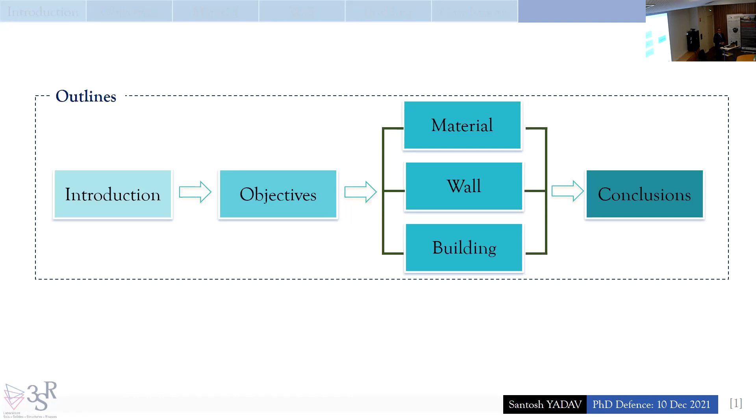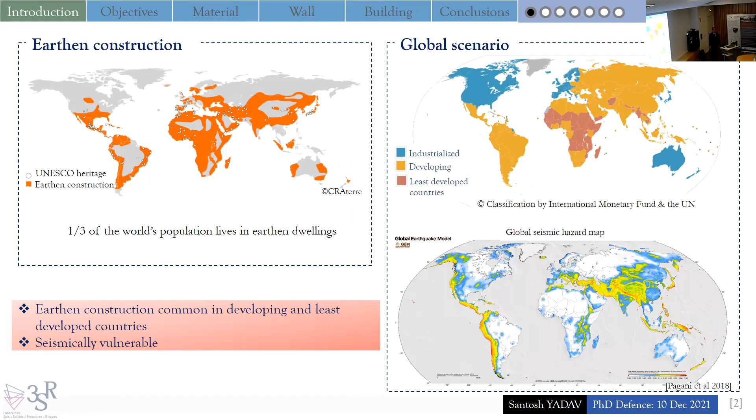Earth construction is one of the oldest construction techniques that is still providing shelter to millions of people around the world. And this type of construction is more common in developing and least developed countries, which also lie in seismically active zones, making them seismically vulnerable to earthquake events. Every year, thousands of lives are lost during seismic events, but actually it is not the earthquake that takes life, rather the building which fails to withstand the seismic load and collapses, that takes life.

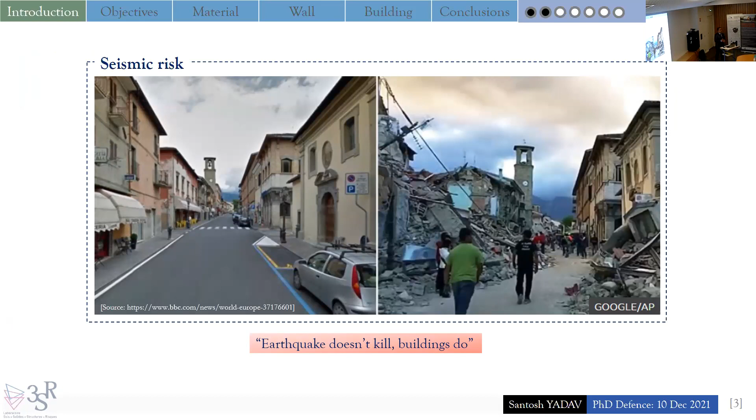So what happens during a seismic event? During a seismic event, there is a horizontal force acting on the structures, creating different stress scenarios for in-plane and out-of-plane walls. And in order to prevent this damage, this effect has to be minimized. There are different approaches available for strengthening unreinforced masonry structures and minimizing the effect of seismic action, and one of them is the horizontal seismic band, which is studied in this thesis.

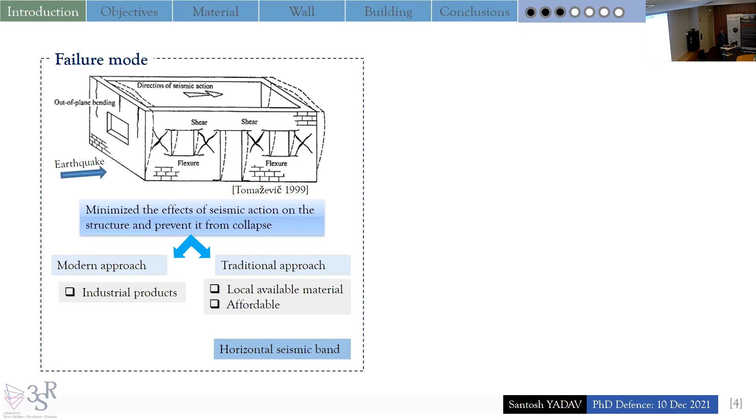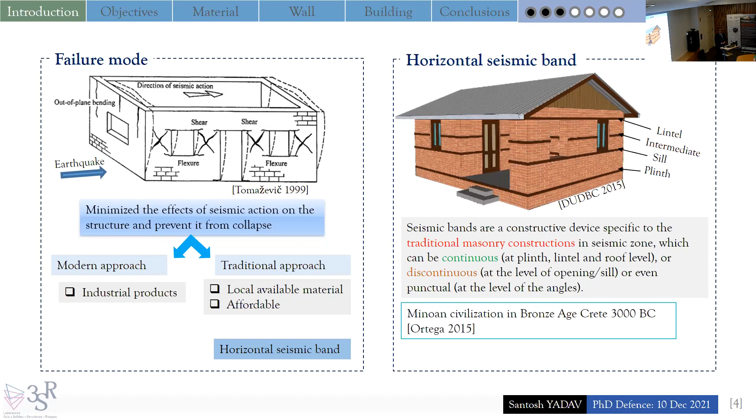So what is a horizontal seismic band? In literature, the exact definition was not available, so we have tried to define a horizontal seismic band as a constructive device, which is specific to traditional masonry construction, that can be continuous or discontinuous, depending upon the position of application. And this technique is not new. It has been used for more than 5,000 years now, and still we see the application of such a band with different materials around the world. But the documentation of the application of such bands in guidelines and building codes is relatively new.

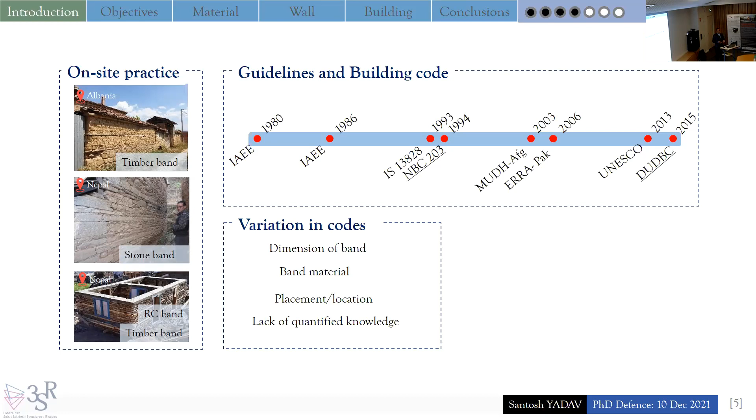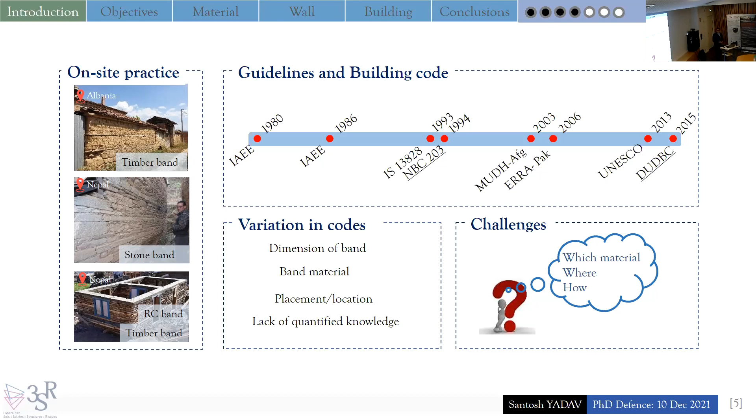It's been 4 decades now, and there are different guidelines which propose and recommend the application of horizontal seismic bands in the building code. But among these codes, there are variations in terms of dimension, material used, and placement of the band, and it also lacks quantified information regarding how the different materials behave in case of seismic action, which makes it challenging to recommend in the field. And in my study, the area of focus is Nepal, so I have referred to the DUDBC guideline, which is based on the National Building Code of Nepal, National Building Code 203 of Nepal.

Nepal lies in a seismically active zone because of the presence of two tectonic plates, and because of the difficult terrain, it's very difficult for road transportation. And due to the seismic event in 2015, thousands of structures were completely collapsed. And as a support from international organizations, AE&CC and CRAterre were involved in the reconstruction activity in Nepal, along with the collaboration of local partner ASF Nepal. During this reconstruction activity, they provided technical support and training to the local community. But not all houses were properly monitored, and people were seen applying different types of bands in the same structure without following the guideline that was provided by the DUDBC, which created a challenging question regarding what could happen in case of a future earthquake.

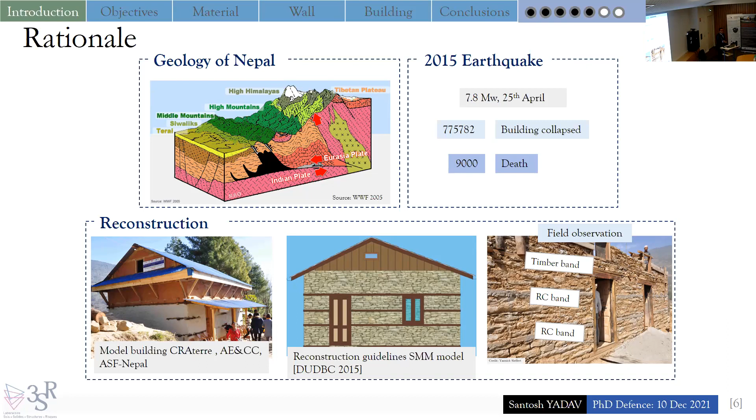Because of the active seismic plate, it's only a matter of time when it will occur, but definitely we have to make sure these structures are safe from the future earthquake. And in the field during the reconstruction, there were various stakeholders involved, and they were not able to address the concern regarding the selection of material, whether it should be used with the timber or with the reinforced concrete, and what could be their performance in case of future earthquake.

So in order to address these challenging questions and the request from the stakeholders, AECC took the responsibility to collect the relevant information from site and collaborated with 3SR Lab in order to study this behavior scientifically. So in the global interdisciplinary framework, my PhD research work plays a small role in addressing the scientific challenge that is faced in the field, and provides the scientific recommendation for the community and the various stakeholders, which will

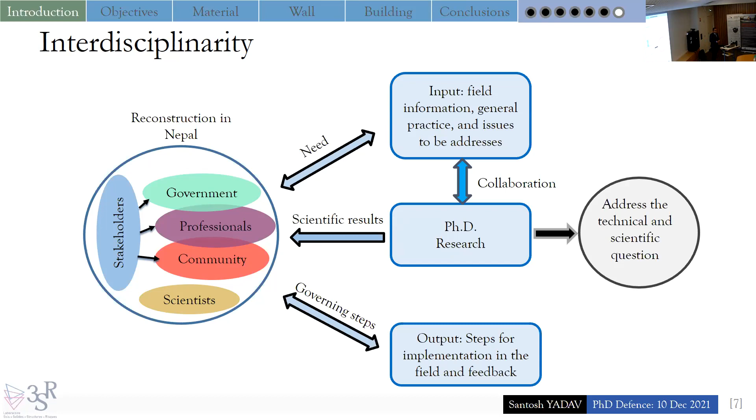be later shared among various stakeholders to implement in the site, and also get feedback from the community in order to decide what further research work has to be carried out in order to address the issue in the field. Even in the core PhD research work, there is the involvement of various engineers and architects, which helped in planning the experiment, designing the setup, and execution of all the experimental work.

Now, looking at the state of the art on seismic bands, the mechanical performance of seismic bands has been studied in quasi-static and dynamic tests, but there are only a few research works which highlight the advantage of having a horizontal seismic band in the structures, and there is a lack of comparison between different materials when used as a seismic band. And also in numerical analysis, only a few numerical analyses have been made, and there is a lack of proper validation from the experimental work.

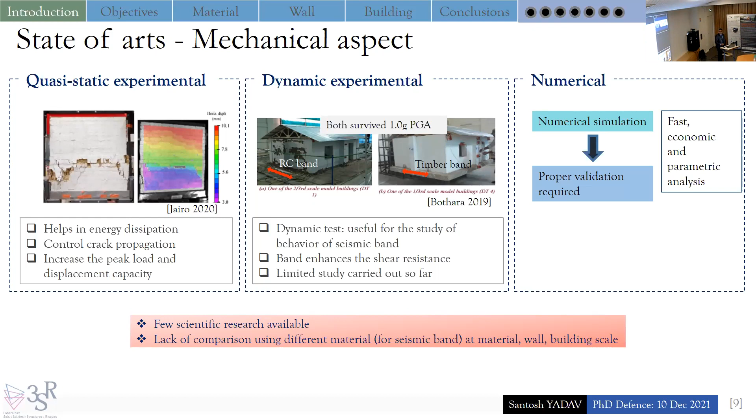No problem, continue. Okay. That doesn't matter.

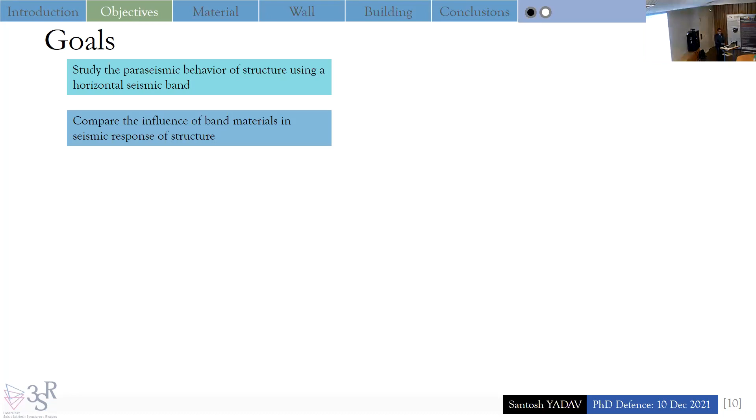Okay. So to address this gap in the literature, the objective of my thesis is defined. The main objective is to study the behavior of horizontal seismic bands and compare the results of two materials when used as a seismic band, one timber, another reinforced concrete. This project is a part of a global work, which is classified into experimental and numerical. My work is mainly focused on the experimental work, and there was another parallel PhD who developed a numerical model for masonry structures, who completed recently, a few months back. And my experimental results were used for the validation of his numerical model.

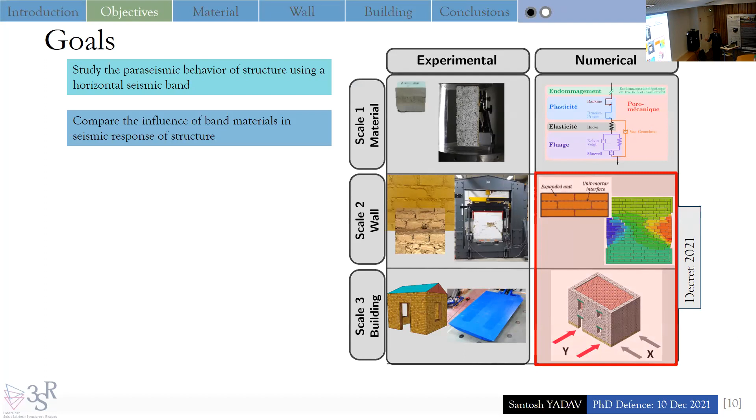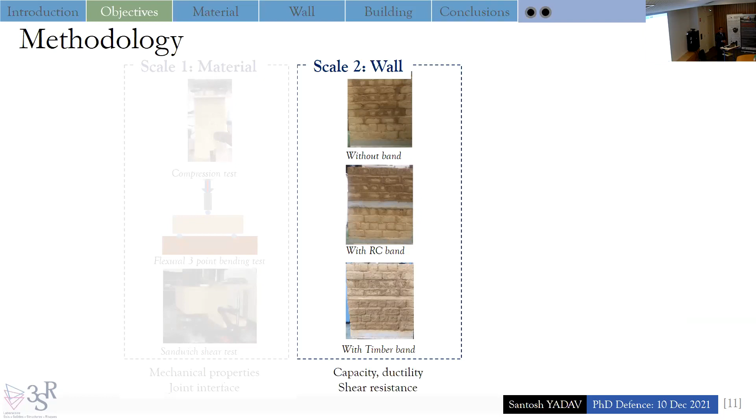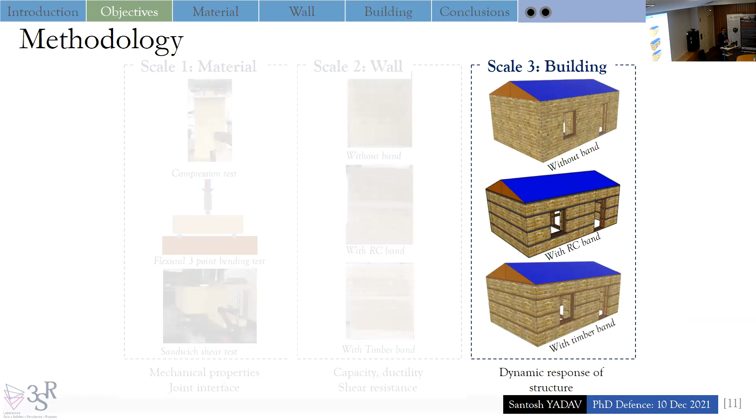To achieve the goal of my project, we have divided the experimental campaign into three different scales. Scale 1 is at material level, where the mechanical properties of the material and the shear resistance at the interface are studied. At scale 2, the characterization of the wall is made with regard to capacity, ductility, and shear resistance. At scale 3, a reduced scale house is tested under dynamic load and their performance is compared. But before moving ahead with exploring the results, let me walk you through the timeline of my PhD journey.

Since the beginning of 2018, I was involved in the development of two experimental setups, the shake table and the shear setup. I spent more than 1 year developing these two setups along with another PhD student. And I also had developed and constructed samples to be tested on the shake table and with the shear test apparatus. But there was a fire incident in February 2020, which destroyed everything, both the apparatus that was developed was destroyed, and all my samples were completely gone. So there was no result available.

So in order to continue my work, we had to redesign and reorganize the whole experimental campaign. We had to design a new experimental setup, a reaction frame setup, to continue work at 3SR Lab. And we are really thankful to FCBA for providing us the opportunity to use their shake table for the dynamic test. And due to several reasons, there was no other option than choosing extruded adobe for our reduced scale model. But this also provided us the opportunity to compare two types of material, adobe and extruded adobe, which is compared during the study.

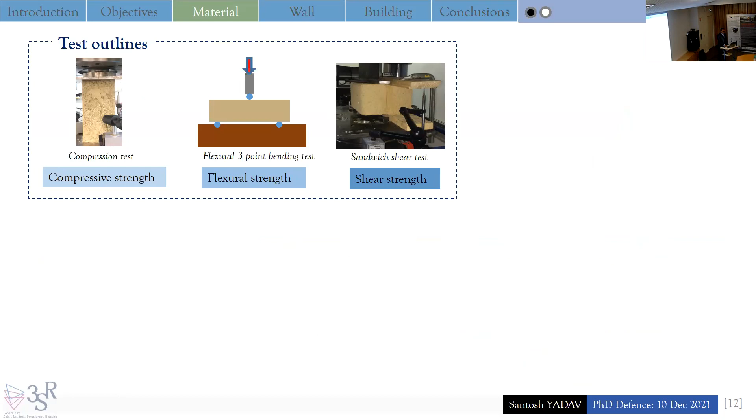And it was a very challenging period due to the pandemic and a lot of events that were ongoing. So it was a very challenging task to be completed in a short period of time. So now let's move ahead with exploring the results for material scale. Three types of tests were carried out to measure the compressive, flexural and shear strength of the material. These tests are important because during an earthquake event, the structures go through different stress scenarios, creating different stress modes, and these stresses can govern the overall behavior of the structures.

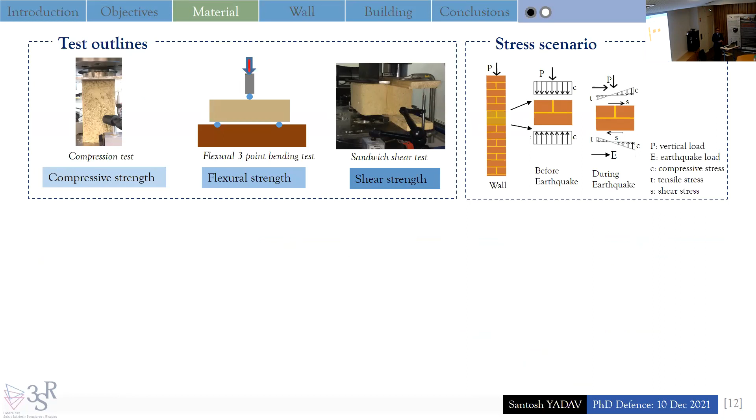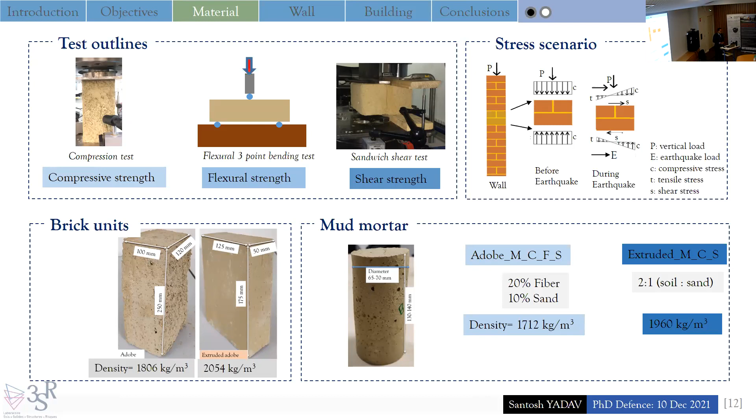Two types of brick unit are used: one is adobe, which is standard size, and the other is extruded adobe, which we have customized for our reduced scale model. There are two types of mortar, one used along with the adobe brick and another with the extruded adobe brick. For the compression test, the adobe brick is tested in the vertical orientation without having any interface on the surface, and the two mortar compositions are tested with cylindrical samples. The difference in the compressive strength is due to the composition of the material and the manufacturing process.

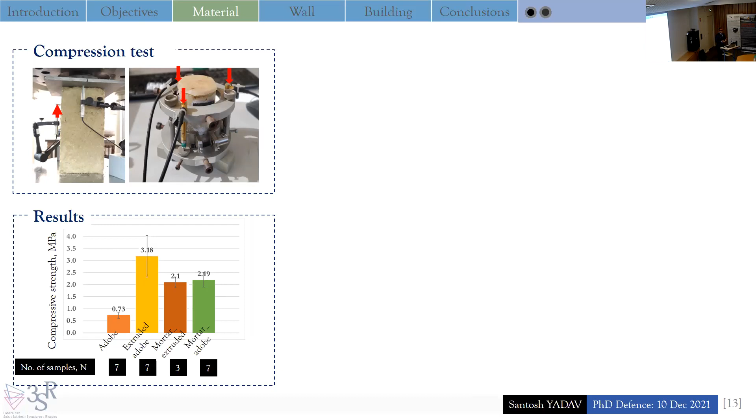Similarly, the flexural test is carried out with the 3-point bending test, and the maximum force at failure is used to calculate the flexural strength. As the failure is from the bottom part of the brick, which is brittle in nature, the flexural strength can be equivalent to the tensile strength of the brick unit.

Another test was done with a sandwich sample. We tested by fixing one of the bricks and applying load on the other brick in order to determine the shear resistance. This technique can also be used while optimizing the composition of mortar, which is very relevant in field applications as well. Here we can see the value for extruded brick is lower as compared to adobe because of the surface rugosity of the brick unit itself.

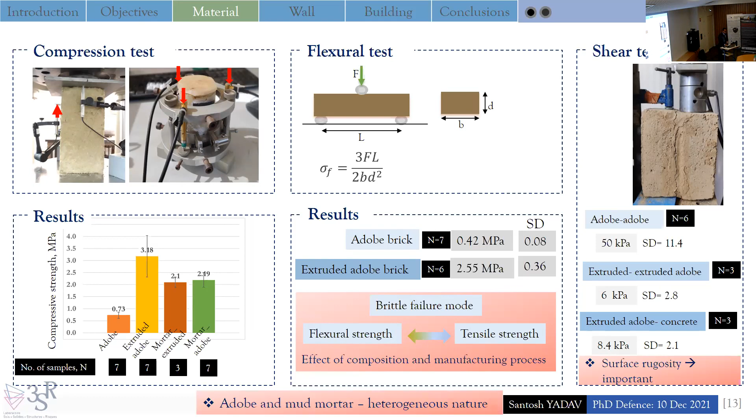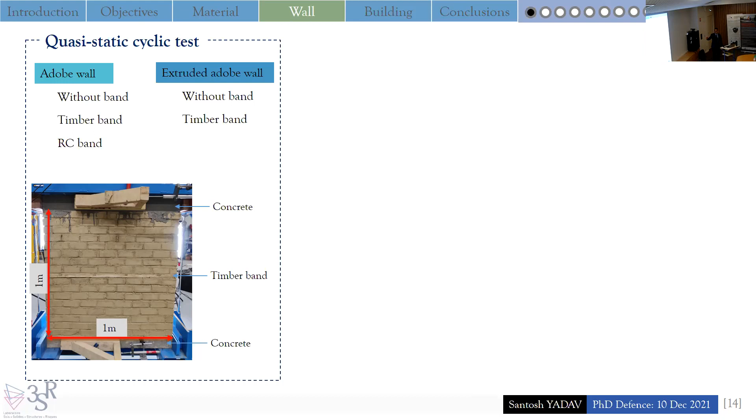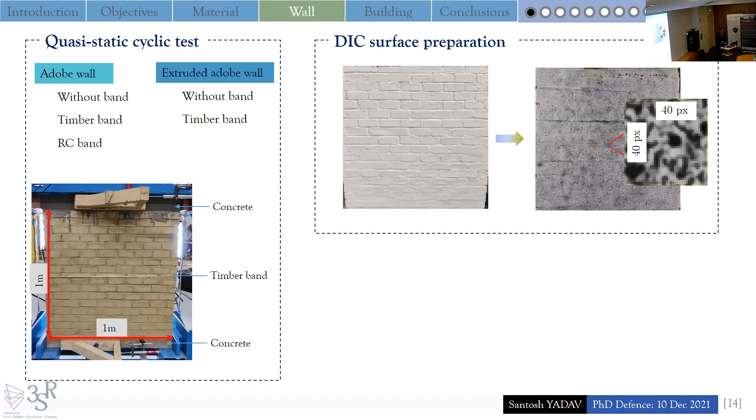Next, 5 wall samples were prepared, 3 with adobe brick and 2 with extruded adobe brick, and the dimensions of these walls were inspired from previous research work. At the bottom and at the top, we have a concrete part which is used as a support and for load application. All the samples were prepared with a random speckle pattern in order to carry out digital image correlation, and the results obtained from the measurement sensors and digital image correlation are analyzed.

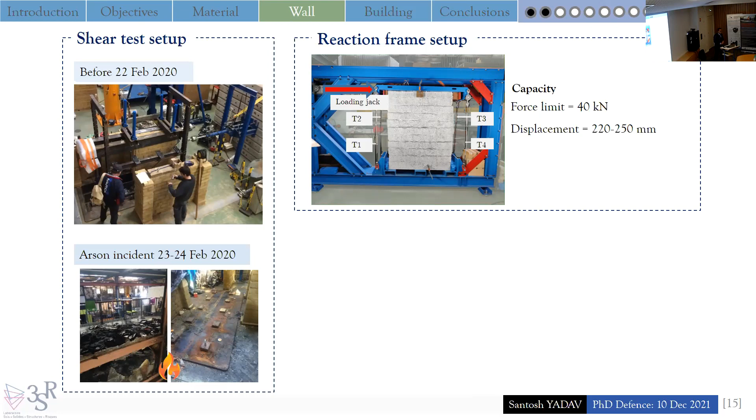As mentioned earlier in the timeline, we had developed everything for the quasi-static test, but unfortunately fire destroyed everything. To continue the work, we developed another setup, a reaction frame setup, which is driven by an electrical jack of capacity 40 kilonewton. The 4 bars indicated as T1 to T4 are used to apply the initial pre-compression load on the sample, which also helps prevent the initial rocking moment and transfer the shear force in the shear plane. All the tests were carried out in displacement control mode, and the same loading was applied for each wall.

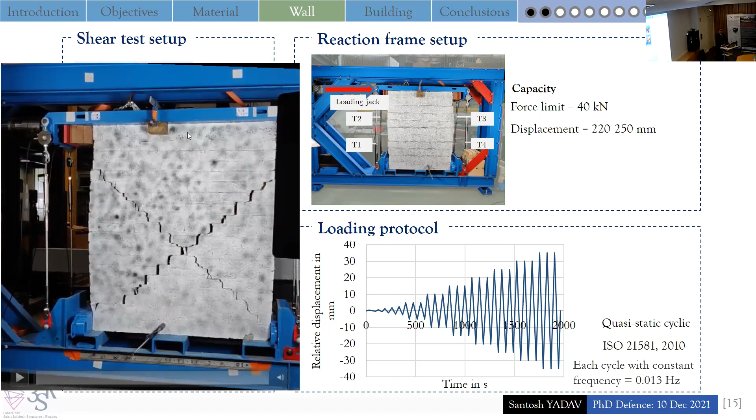So let's look at one of the videos of the test. Here we can see the load is applied on the top part, and we have a force sensor measuring the applied force, and there are 2 LVDTs attached at the bottom and at the top measuring the relative displacement, which is used for further analysis.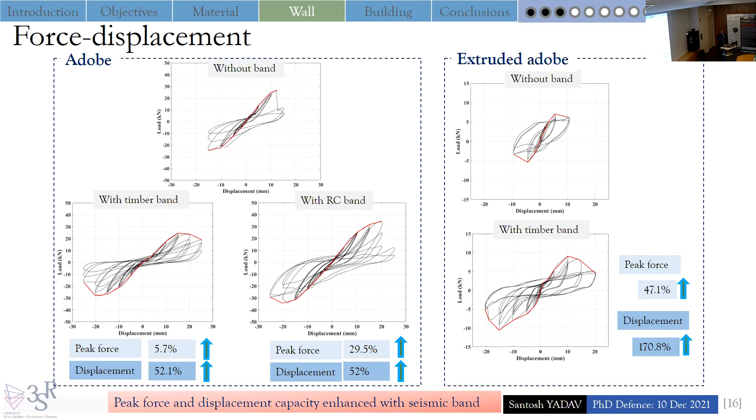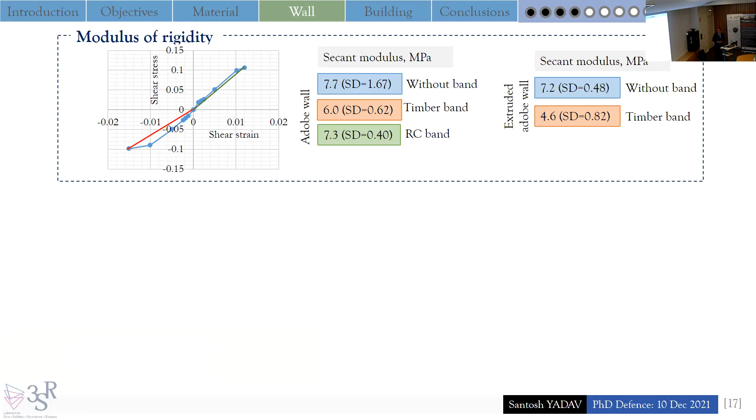Next, for calculation of the modulus of rigidity, the same curve envelope is used to obtain the shear stress-strain curve, and the secant modulus is calculated at the maximum level in both the positive and negative loading directions, and the mean value is taken for each case, which ranges from 4 to 7 megapascal. Another calculation is made for the stiffness degradation. For this, the stiffness at the same level of displacement in both positive and negative directions is used to measure the slope between those 2 points in order to obtain the stiffness at each level of loading or displacement limit. Here we can see that with the application of the seismic band, both the modulus of rigidity and the stiffness degradation rate are modified.

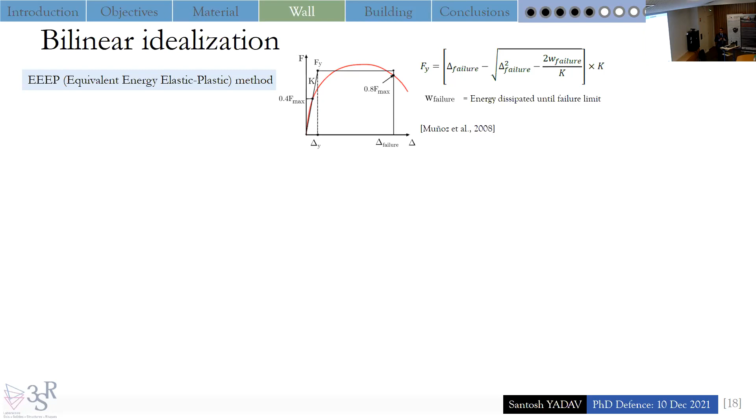Next, in order to characterize the behavior of the shear wall, bilinear idealization is made with the help of the equivalent energy elastic-plastic method. In this method, the failure limit is measured at 80% of peak load in the post-peak phase, and the initial stiffness is measured at 40% of the peak load, which provides the yield force limit taking into account the equivalent energy dissipated until the failure is reached. The bilinear idealization curve is developed for both the positive and negative parts of the envelope curve. For both walls, we observe that the capacity and the ductility limit are enhanced with the application of the seismic band.

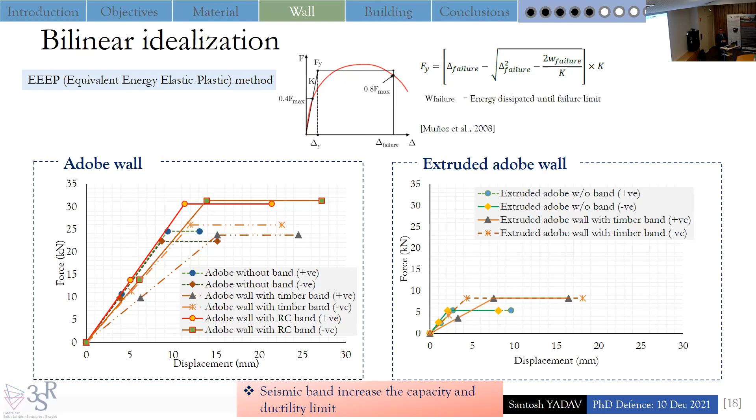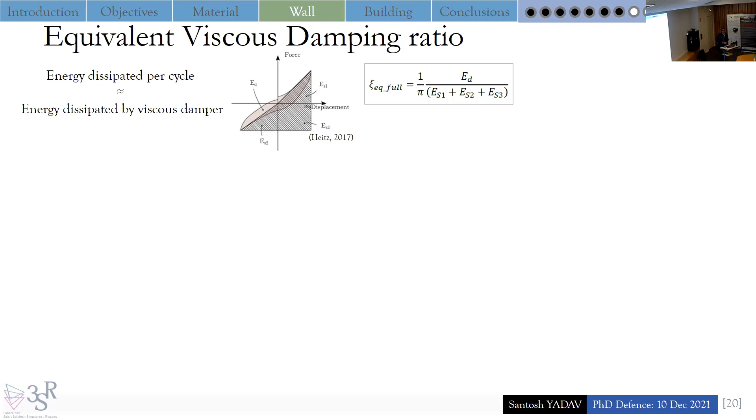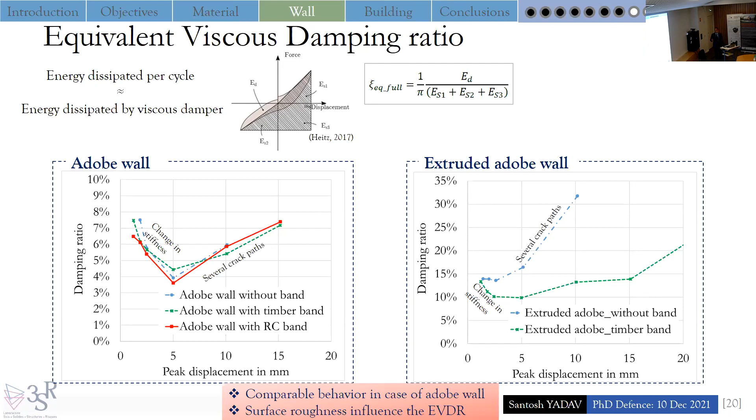Next, for calculation of equivalent viscous damping ratio, we have used the hysteresis curve, and the principle used is that the energy dissipated per cycle is equivalent to that of viscous damping. Here we have used the full cycle approach, and the result is compared for different configurations of wall. Here we see with the adobe wall we have relatively comparable curves, but in the case of extruded, which has a relatively smooth surface, we see a significant difference in the viscous damping ratio value.

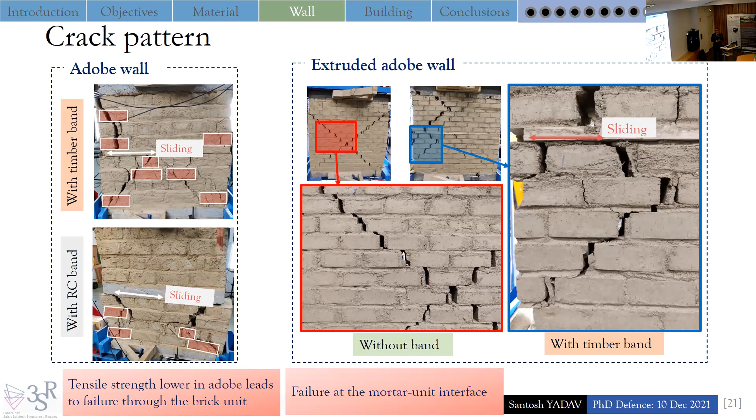Next, the qualitative analysis of the final crack. Here we see the red box indicates the location where the crack went through the brick unit. It is because of the lower tensile strength of the adobe brick, which allowed the failure to pass through the brick unit. But with extruded, which has higher tensile strength, all the failure was at the interface between the mortar and the brick unit in both cases.

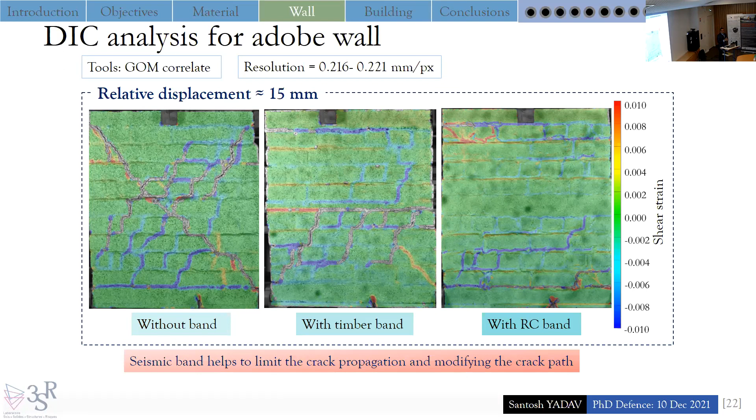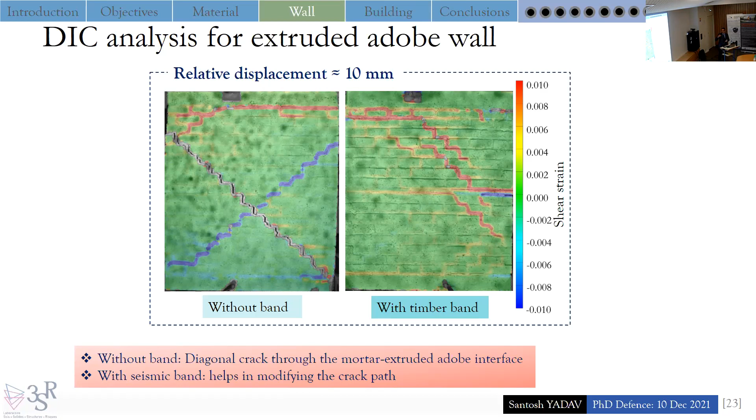Next, scale 3 building. I was involved in developing the shake table. There were a lot of issues which were tackled and resolved, but unfortunately after the fire nothing was available. And we are really thankful to FCBA for providing us the opportunity to use their shake table, and also for the financial support from the insurance. And it was really hard work of our entire team during the pandemic, who made all these three house models successfully, which was a real challenge for us.

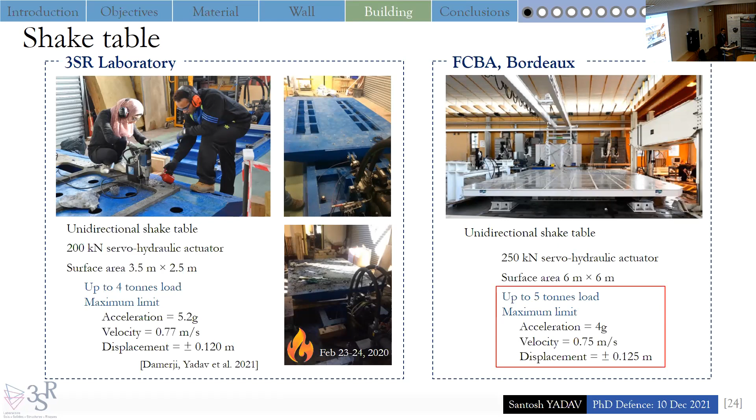The capacity of the shake table is very important in order to determine the size of the structure that has to be tested. So in order to design what should be tested on this table, we considered the capacity of the shake table available at FCBA. And we decided to use a half-scale reduced model for 3 different configurations. The dimensions of this house were adopted from the DUDBC guideline, and a simplified model was chosen in order to compare the behavior of different band materials.

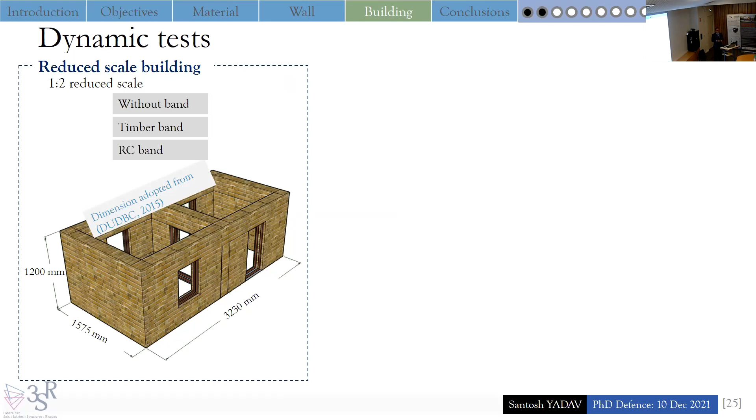The structure was also made symmetric with the application of 2 windows and 3 doors in order to prevent the torsional effect. All the dimensions of this house were modified as per the Cauchy law, and the earthquake signal that was tested was also modified as per the scaling factors in order to have the same effect on the reduced structures. Finally, the results obtained from the measurement sensors and with the application of DIC have been analyzed. But before moving ahead with the result exploration, let's look at the specimen preparation stage.

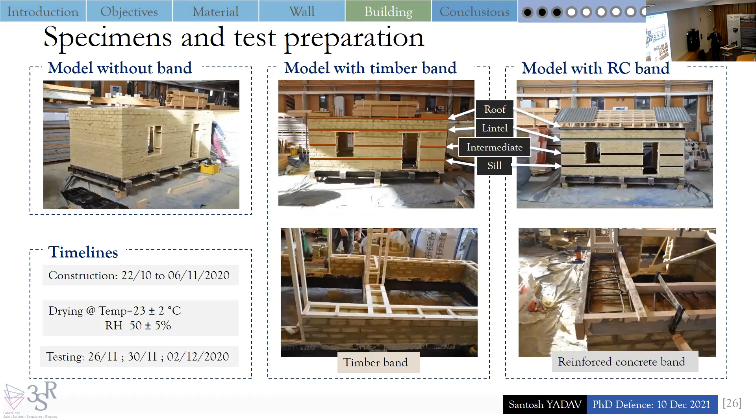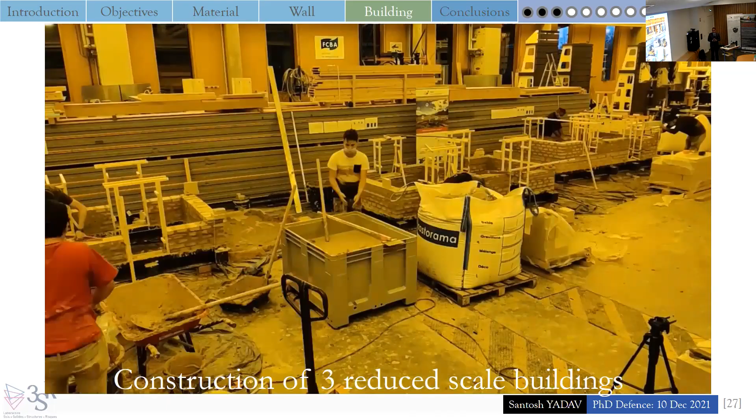So 3 houses were prepared, with the only difference being the application of band at 4 different levels: sill, intermediate, lintel, and roof. All these houses were prepared simultaneously on the 3 metallic frames. We had the help of 5 master students for 1 week during the construction work, and all the 3 structures were simultaneously built with mud mortar and extruded adobe brick.

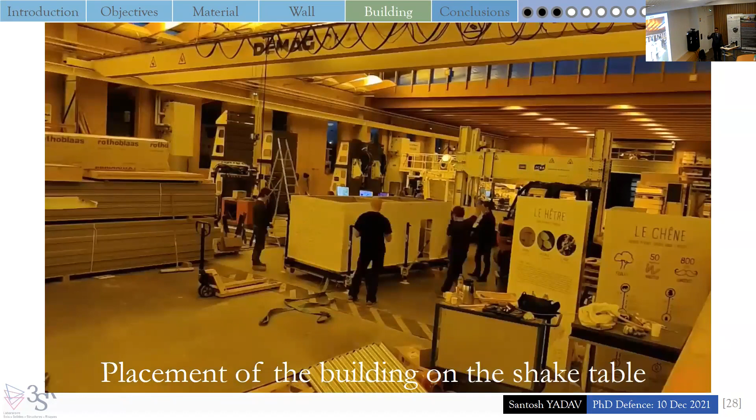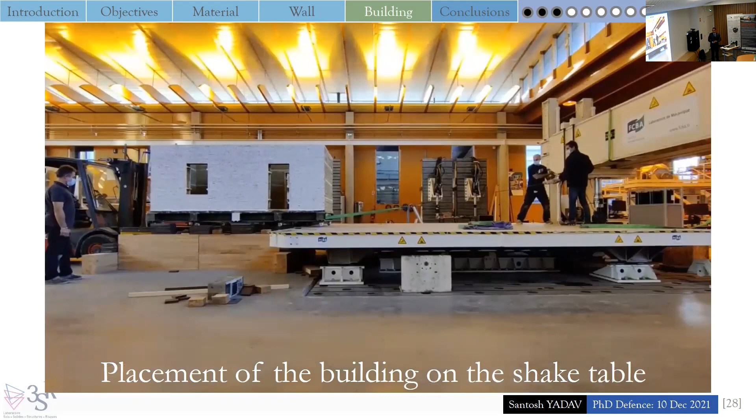This structure was left for drying for approximately 3 weeks before we started applying speckle patterns on each surface for digital image correlation. And we also developed a new setup in order to move the sample from the floor level to the table. So here we see the process of moving the sample from the floor onto the table. After placing the sample on the table, all the measurement sensors were installed and the test was carried out.

For each house, we applied 5 different levels of loading, starting from the lowest to the maximum. This one is at the final stage of loading without band structures.

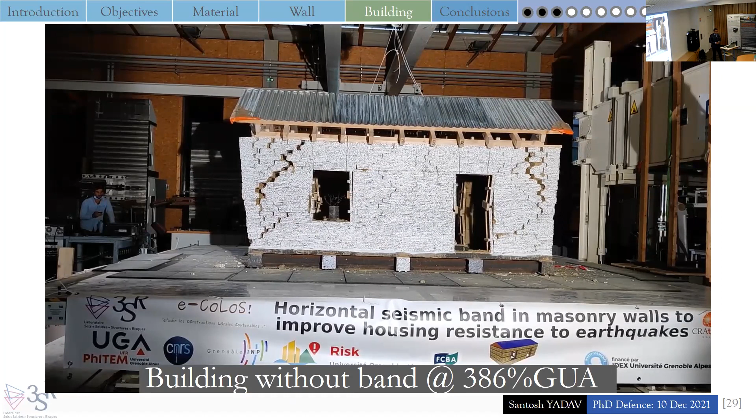All the structures had 2 types of measurement sensors. Accelerometers were placed on the top of the structures at the corners, and the out-of-plane wall had 7 draw-wire displacement sensors, 5 along the midline of the out-of-plane wall and 2 at the corners, sensors 6 and 7, which were also used for the validation of the digital image correlation.

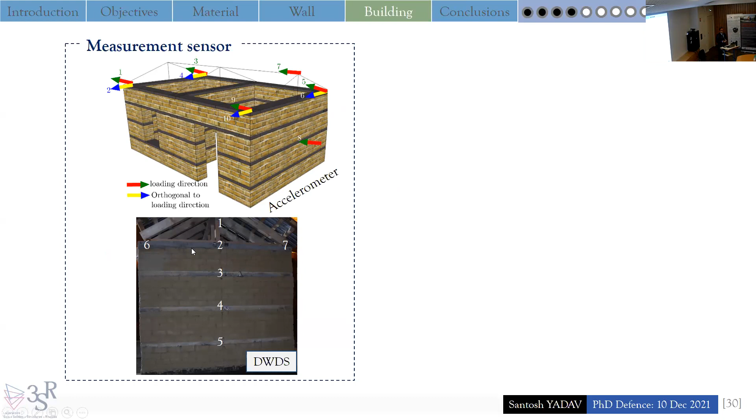For the imaging setup, we had 2 camera setups: one high-speed camera recording the image of the in-plane wall, and another 2 cameras for a stereo vision system recording the image of both the out-of-plane and in-plane walls. Most of the analysis has been made with the help of images captured using the high-speed camera, which was recording at 1,000 frames per second.

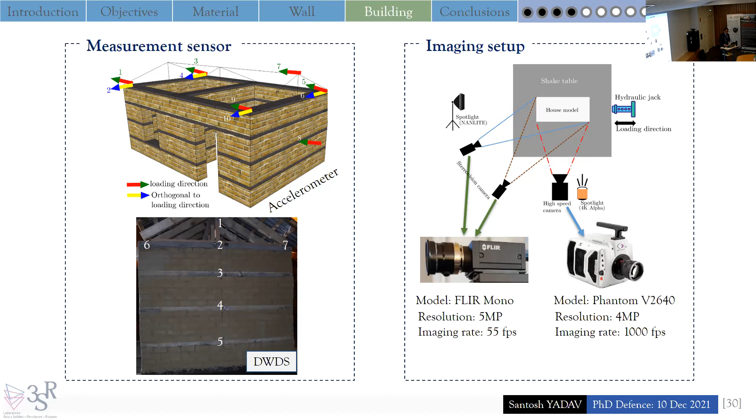For global structure response, all the structures were tested with a white noise signal before we started the test. And after each loading cycle was completed, we applied another white noise to measure the difference in the fundamental frequency of the structures, which helps us indicate the extent of damage after each loading cycle. Similarly, the amplification of acceleration was measured by taking the average value of the accelerations measured by the 4 accelerometers placed at the corners of the structures.

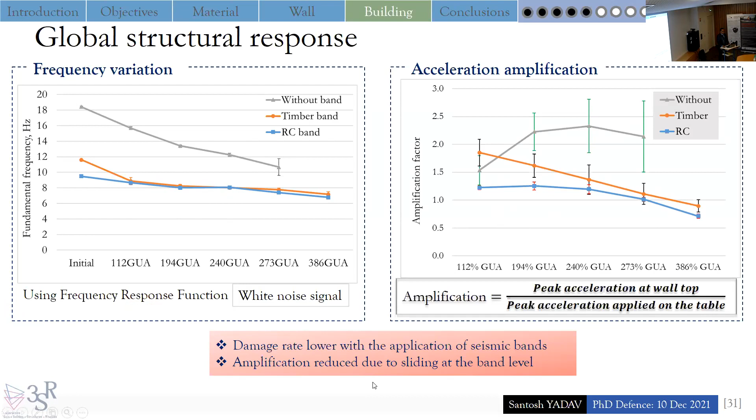And here we see, with the help of the seismic band, the damage rate is also modified, and we have a lower amplification because of the sliding at the interface between the seismic band and the other unit. Another calculation was made for equivalent viscous damping. For this, the half-power bandwidth method is used, which takes into account the 2 frequencies on the pre- and post-peak side and the peak value. So here we have compared the average value of equivalent viscous damping, and we find comparable results for all the 3 structures.

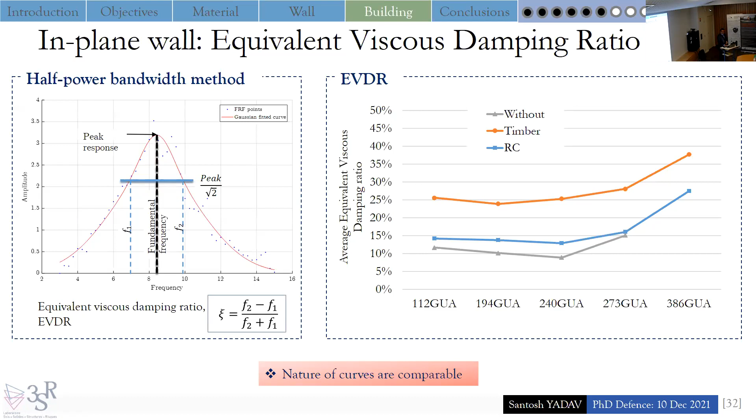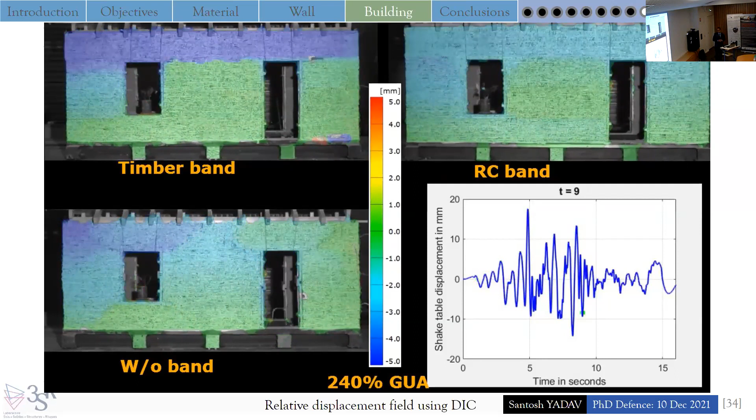Next, digital image correlation is very useful for finding the displacement field throughout the sample, and we can pick individual points in order to make the analysis. So here I have compared by taking the major principal strain, which also helps us see how the crack has been generated at different loading cycles and how it has propagated during the loading cycles. Here we see the crack that was generated in the upper part is moving to the bottom sections without any band, but with the band, the strain is concentrated at the band level, and it prevents the propagation of the crack between interband sections.

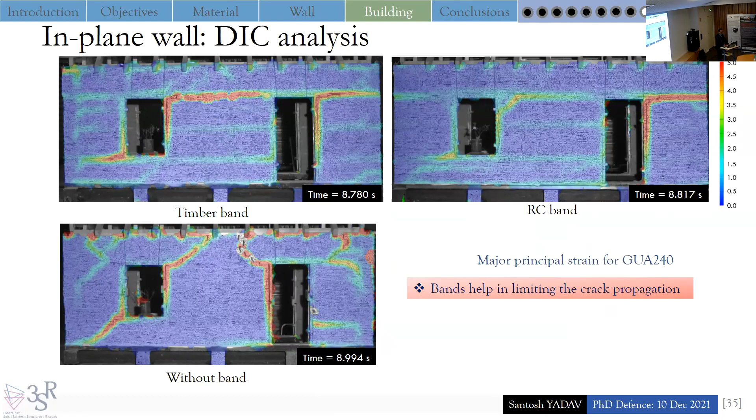Another analysis is hysteresis energy dissipation, for which I have also used the results obtained from the digital image correlation. I have taken the right part of the structures and divided it into 4 different sections separated by the band levels. For each band level, the force value is calculated by taking the average accelerations, and the relative displacement is measured by taking the difference between the top and the bottom part to generate the hysteresis curve for force and relative displacement. But this hysteresis curve is very complicated to understand. So in order to simplify the work, I decided to discretize the result in 1 second time intervals, and then the area under the curve is calculated for each second.

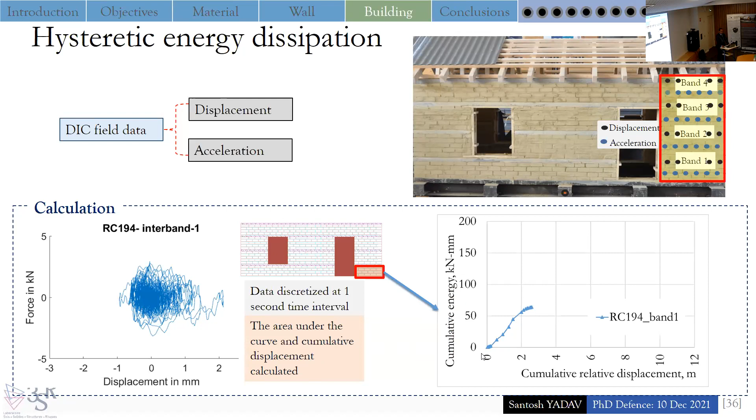So here we plot the cumulative energy dissipation with respect to the cumulative relative displacement, and for each interband section we have made a calculation for this behavior. When we compare the results for different interband sections, we see that interband level 3 has the maximum energy dissipation, and band level 4 has the least cumulative energy dissipation. It was the same for all the 3 structures.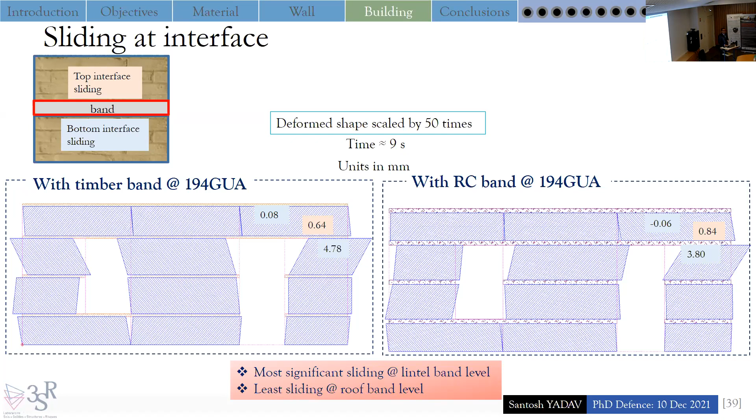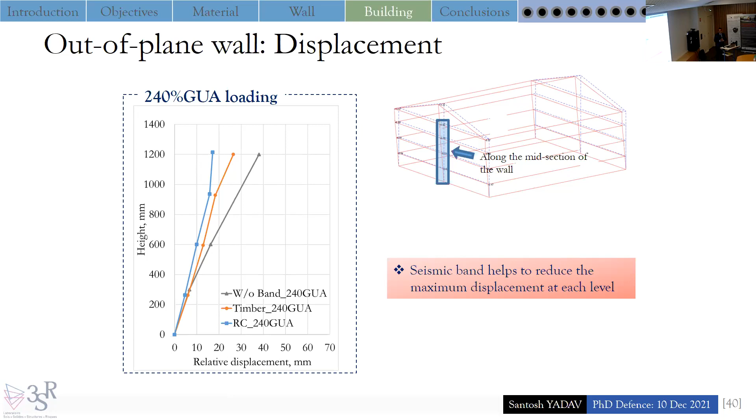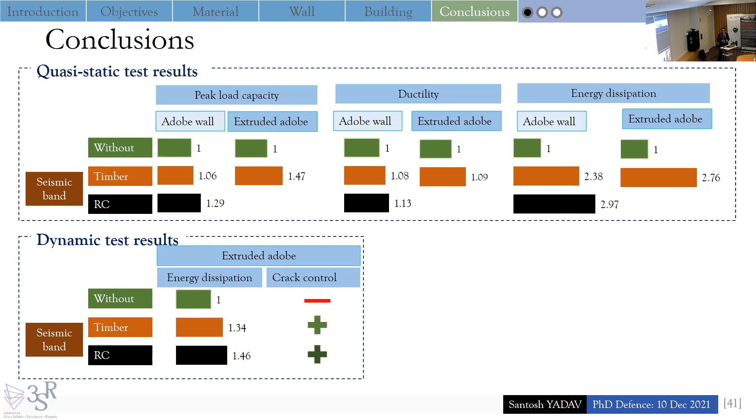In both the structures, even after the 5 loading cycles, there was repairable damage and the structure was still standing. So both structures help to control the crack propagation. The main conclusion from this whole experiment is that with the application of seismic band, the seismic characteristics of the structure are enhanced, and both structures with the seismic band were not completely damaged, and were within the repairable limit. That means the main objective of the house, to prevent collapse and save life, was achieved by the application of both seismic bands.

We can also see there is a difference in performance between the timber band and the RC band, which is because of the difference in the size of those two types of band. With the timber band, there is a possibility that we can enhance its performance, but for the RC band there is no other way we can modify it to get better performance. Also with the RC band, we need more time to prepare the sample, and we need a timber formwork to make the concrete band. So there are two different scenarios for RC and timber band.

With the help of different analyses, we found that if there is a chance of having only a few bands, we can recommend using at least the lintel band, or then we can increase the number of bands if we want to apply the sill level band.

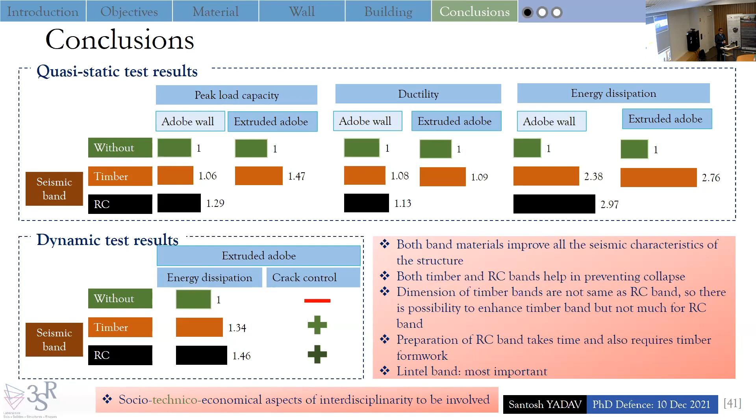In this research work, we have quantified the performance in terms of technical characterizations, but the choice of this type of material should also consider the economic and social impact, which has to be incorporated in the context of interdisciplinarity. So the perspective of this work is, as mentioned earlier, that the behavior and the performance of the timber seismic band can be enhanced, and so more study has to be carried out to see the influence of changing the dimension of the timber band.

Another research should be carried out to see the influence of seismic band in modifying the slenderness ratio for out-of-plane walls. And the approach taken in this work could also be used to study other materials used as seismic band. For instance, bamboo or sugarcane materials, or the geogrid mesh that is used to separate different levels of sections, could be used in a similar approach and studied.

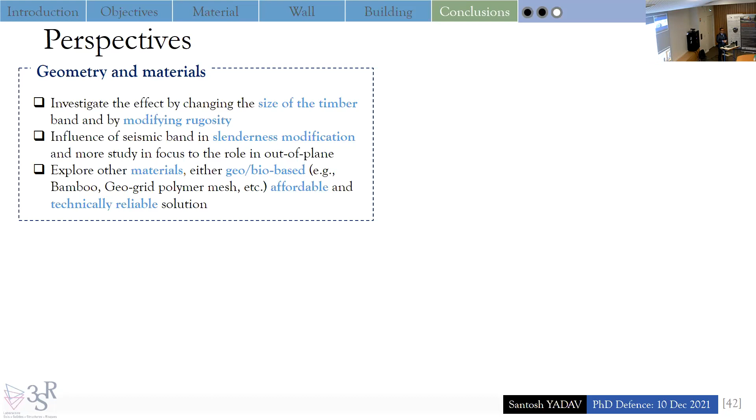From the mechanics perspective, we applied 5 levels of loading with increasing patterns. But it would be interesting to see what could be influenced if we apply the maximum loading directly to the structures without gradually increasing the loading. Also in our case, we had fixed normal axial stress for the shear wall test, but the influence of varying the normal axial stress could be studied. Another interesting thing is to investigate the influence of the drying period for different wall configurations.

For the socio-technical aspect, the quality control in the field is very difficult, and there is a lot of variation in terms of how it is applied. For instance, the placement of RC reinforcement bar is different, and also the configuration of the timber is different in the field. So it would be interesting to see what is the influence of having different configurations and how it can influence the overall behavior of the structures.

And also the next interdisciplinary work which could be interesting is to see what is the adaptation on the socio-technical aspect in the community, where our local partners and various stakeholders could play an important role in order to disseminate this information on the site and see how people behave or how they respond in order to adapt

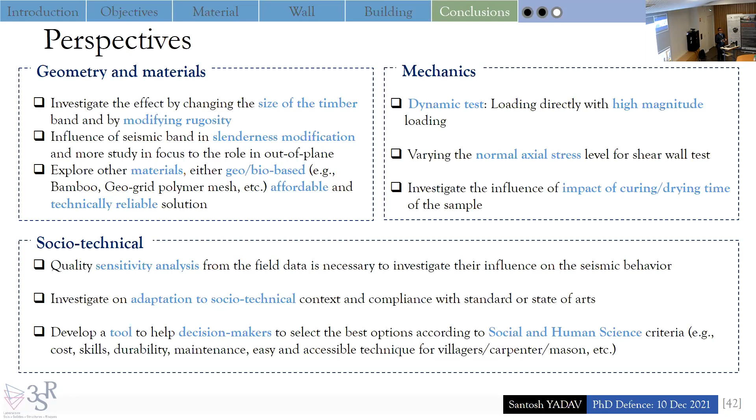this technology. And also another thing is to develop a tool which takes into account the cost and the durability and the many other aspects of social and human science, in order to provide tools for a decision maker to select what materials should be used and what could be their performance, whether it is always reliable to use only RC or the timber. It would be a choice with different parameters, not only the technical part. So there are many other things that have to be developed.

Talking about the main contribution from this work, a multi-scale experimental campaign was done in order to study the seismic response of the structures, and it was also used for the validation of a numerical model for another PhD. And after validating this numerical model, it would be interesting to carry out the parametric analysis to understand more what would be the response by changing the dimension of the band or by changing the position of this band, which could be also an economic way to understand and study this behavior.

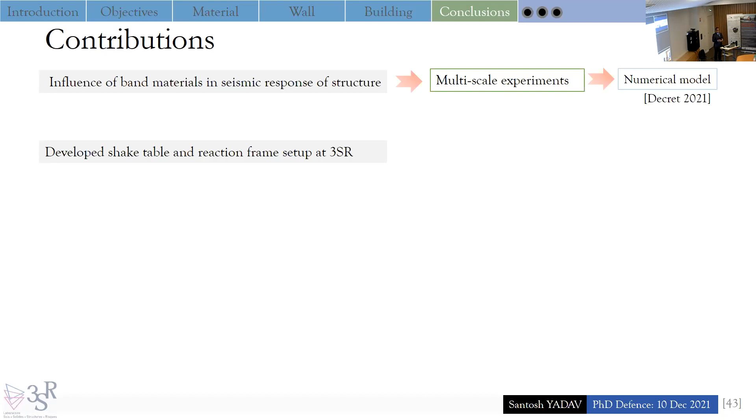Another contribution was that we developed a shake table and reaction frame. Even though I was not able to use the developed shake table, we know all the ingredients, how we can redevelop it. So we know what should be checked while making it again to make it functional. Another development was that we designed a new method in order to construct the house outside the shake table and move it before the test. So 3 houses were tested, and the shake table was used only for 6 days. So we could save a lot of time in utilizing the shake table using the same method.

And also another contribution from my work was that I introduced an innovative method of applying speckle patterns on large surfaces, which could be used for both the high-speed camera and stereo vision camera system, which would be a really good opportunity for different other tests.

And for the past 3 years, these are the list of journal articles, conference articles, chapters in the book and research catalog developed.

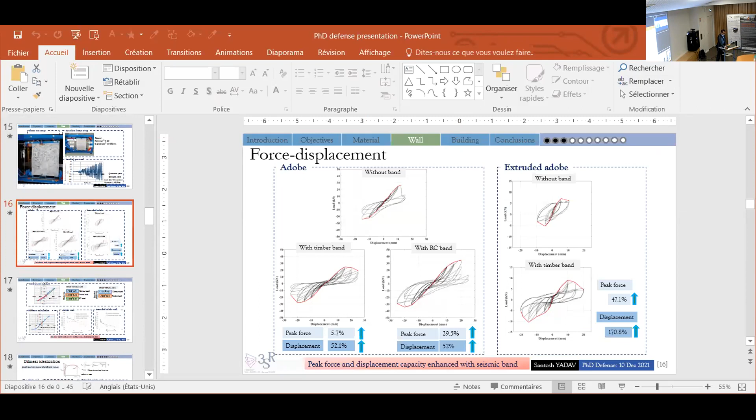Yeah, but after that, I understand that it's a bit difficult to assess it. I was wondering if you zoom in on one of your figures, for example, figure 4.7, the hysteresis and envelope curves of adobe. It's a wall, it's a structure, right? Yeah. It's not the material, basically you have the joints, but near zero, I think maybe it is elastic, but if you zoom in on this kind of curve, maybe you can assess if it is elastic or not, but I'm not sure, I'm just asking. What do you think? Yes, this kind of curve. If it is elastic, it's only a line, isn't it? Yeah. But in our case, we have a little bit of a loop. So yes, you can see it's not elastic. Yeah, okay. So I just wanted to point this out.

Yeah. So, okay. And the last question is about the digital imaging. I think, as I said, it's very hard work because I've done that when I was younger. So I can understand why it was not digital at that time. It was analogical, and for each house we had 19,000 images. Yeah, so 19,000 times 5 for each house configuration. So you do much more now. Yeah. At that time, I had only 2 slides. Okay.

So 2 by 2, you know. Yeah. So you use different analysis because with the walls and the structure. In the structure, you use the shear strain, if I remember well. But in the wall, you use the principal. Why? Because in case of structures, there might be some torsional effect, which is not captured if we only look at the shear. That's why to have the major strain value, we use the principal strain.

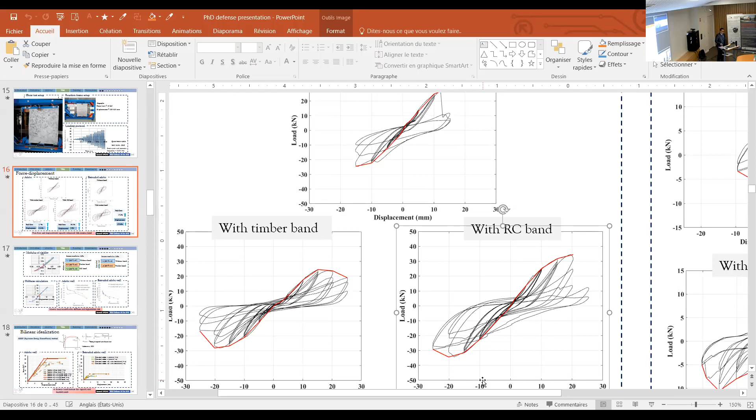Mr. President. Thank you, Jean-Claude. I'm not sure that Mr. Jigyasu is online. Can you please ask him, Santosh? Yeah. Because he doesn't hear us, isn't it? No, he can hear me. I think he can hear. Dr. Roy? He said like he will be away for a few minutes. Yeah. He had something. Okay, maybe I can begin. Yeah, okay, you can begin on that.

Okay, I will take the floor as a reviewer of your work. But before I start, I would like to thank you three supervisors for inviting me to your defense and for offering me the opportunity to report on your work. I found your work extremely interesting, and it was a great pleasure for me to read your manuscript. As my colleague, Professor Morel, said before, I found your manuscript to be very well written. I liked the style you used, synthetic, direct, and efficient, and it was the same during the oral presentation. It was very synthetic and clear, and even though the thesis is written in English, it was not difficult for me to read it and to understand. So I want to congratulate you for that.

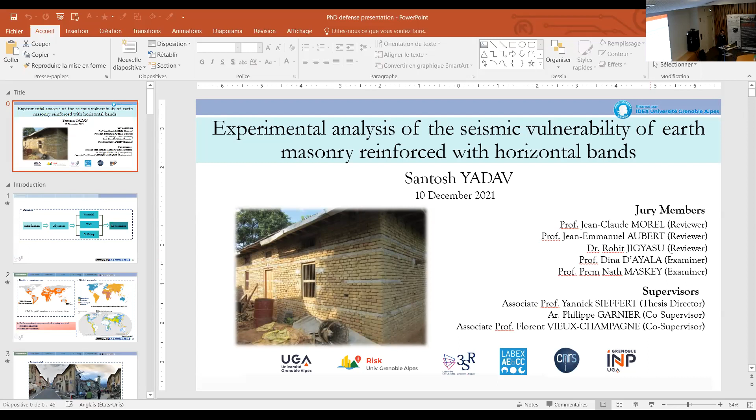I also like the way you have put it all together, because you can easily get lost, especially me, not being an engineer but an architect with specialization in heritage. To be very frank with you, I was intimidated when I looked at your work. But when I went through it, in spite of all the calculations and details, it was very easy for me to understand. I really value that you have put it all together in a very systematic, clear way, and illustrated it very well. The fact that your research has been written so well, in a well-structured, illustrated manner, is the other important value that I must appreciate. So again,

congratulations for achieving that. The third important thing of high value from your research is that you have based it on something very practical and very much in need in Nepal and in other parts of the world, but also in the South Asian region, because a lot of the typologies you have looked at are not only in Nepal but also in other countries, whether Bhutan or India or others. So it has wider applicability, which comes from a need from the ground, and you have boldly addressed that issue. That is going to be very helpful beyond the scientific community.

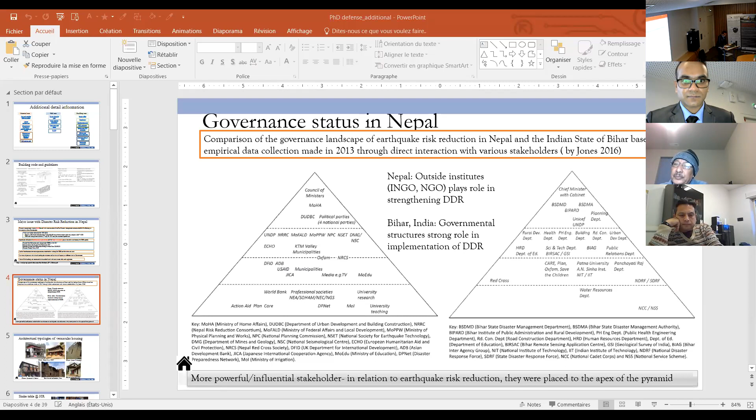So my next question has to do with, because you have been already there defending for a long time, so I will be quite quick. I think if you go to one of your slides, I think it was the final one. You compare the results from the walls and the one from the houses. Yes, this one. So it seems here that when we look at the effect of the timber bands on the individual wall, it's much less effective than when we look at it at the level of the dynamic test results. Do you have an explanation for that?

So for that one, we are looking at the energy dissipation. And for quasi-static, we load it until we reach the failure. So it's not the same scenario for both. So here we are looking at the maximum load capacity, maximum ductility, and maximum energy dissipation in the quasi-static. But for dynamic, we have the same level of loading for all the 3 structures. And here we are comparing the energy dissipation. But why do you think that there is such a good contribution?

If we look at the condition without the band, there is clearly a substantial improvement when you put the timber, and that improvement is very comparable with the improvement in reinforced concrete. But this is not the case when we look at the seismic band in the one-dimensional element or in the two-dimensional element.

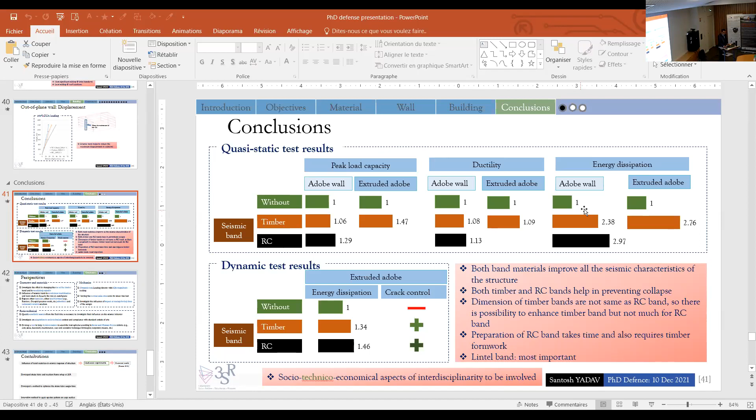I will give the floor to Professor Maskey. Yes, thank you. Thank you, Santosh. Now, first of all, I would like to congratulate you for the nice work and also the nice presentation. That is the first point.

Now, I do have a couple of comments, a couple of suggestions and a couple of questions. Many of my colleagues have already asked questions, so I'm not going to repeat all those things. But what we have to understand is that unless we go for practical application, there is no need for research and academia. So be careful about that, and we should not forget it. Unless we reach the community and the practical part, there is no question of using our research or academia. So be careful about that. This is not a criticism, but we should remember that.

So by saying that, what I mean is that you have to look at the other side of the research also: what we are going to get, and how the community is going to benefit from that. And my colleagues, Rohit as well as Professor Dina D'Ayala, also explained a little bit about that. So be careful about that.

Now, the second point, very important, is we should also be careful not only in the scientific research and tests, but we should also know about the use of materials in the community. They must be accessible, they must be acceptable, and they must be affordable. These are simple words, but very important things. Call it timber, call it bamboo, call it reinforced concrete, whatever it is, we should also think about the possibility of use of these materials in society. Particularly, if you are from Nepal, then don't forget about Nepal. That's my request.